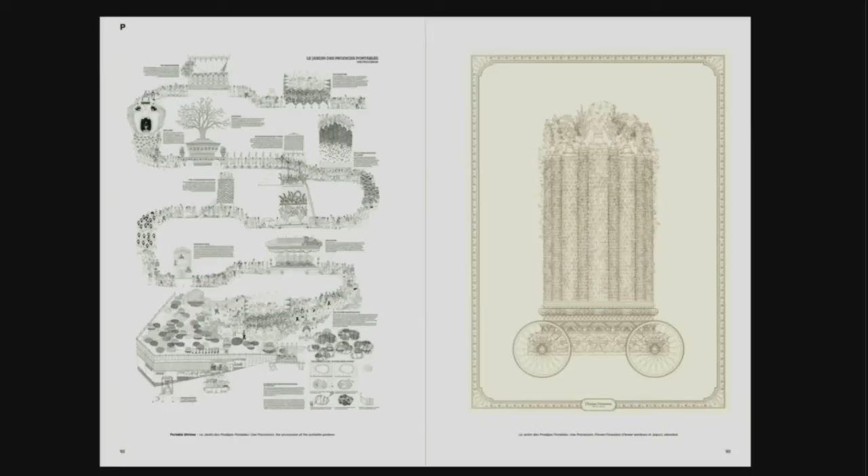If you open the book under the letter P, you could find one of our last projects called Portable Gardens, which consists of a series of garden temple vehicles. As throughout the book, all the drawings are tools consciously thought out for the project to be developed and represented. In this case, the collection of paradises travels each Sunday through different locations in Lausanne, Switzerland.

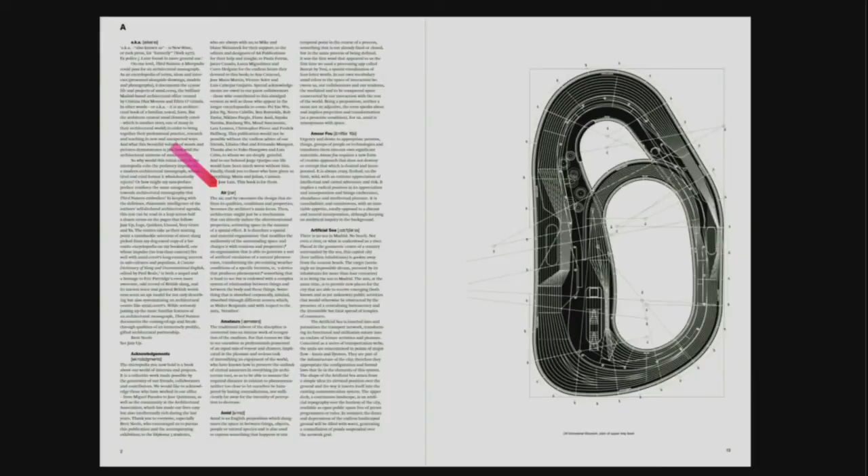As a friend said, the book takes the form of a micropedia, a term taken from the original British encyclopedia that had a three-part structure. One is a huge collection of volumes constructed by long articles and descriptions. Another is the propaedia, the hierarchical outline of knowledge. And the small one, the micropedia, is a collection of short articles meant for quick fact-checking.

If you are interested in one, you can go to the macropedia and discover more. You probably all know that Diderot and D'Alembert's encyclopedia was based on an attempt to compile all human knowledge, ordering and classifying it through a series of terms arranged in the form of an evolved dictionary. Instead of just presenting the meaning of words and their etymology, these primitive encyclopedias began to present them as small articles or monographic essays using a complex system of cross-references. Words were, therefore, doors to the unknown and yet to be discovered, exploratory tools to navigate the immensity of the world out there.

And then, under the letter R, you can find Rooms Around a Garden. So, opening the micropedia, this is the Giner de los Ríos Foundation, which was the entry to a competition and is our last constructed building. Now it's finished, and at the end of this lecture we will show you more things about it.

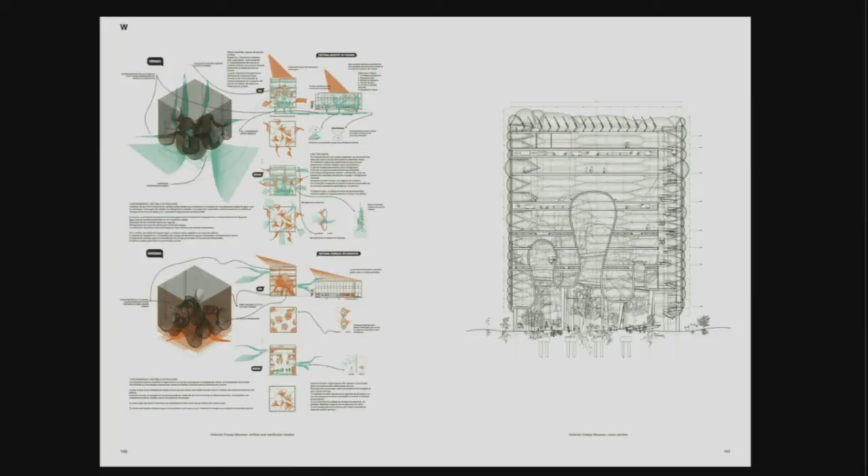We would like this presentation to be something similar to the action of opening this book, this encyclopedia, strolling through the pages and not trying to understand every single thing or project, but understanding this combination of concepts and projects as cultural constructs. And well, we are going to start with the letter S.

So architects normally reclaim space as the main subject of our discipline. And yes, we were also one more of these people that use the word, such that we always explain that these words, such as objects or things, if you touch them too much, they are spoiled because of the broad and intense use of it.

We admit, we understand that space is a difficult term and it has a high number of linguistic difficulties because of the broad meaning and the broad wide semantic field, and of course because of the extremely wide range of conflicting usages. And we can no longer speak without confusion about space.

Because to what space are we referring to? What are we dealing with when we are reclaiming a space as a working field for architecture? And what is the tradition of this term in the field of architecture? So for us, the word space has a condition that is inherently linked to a non-passive character.

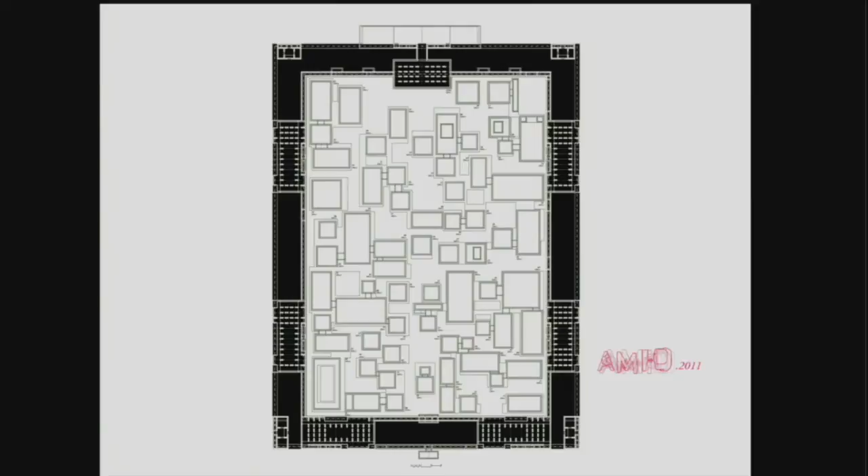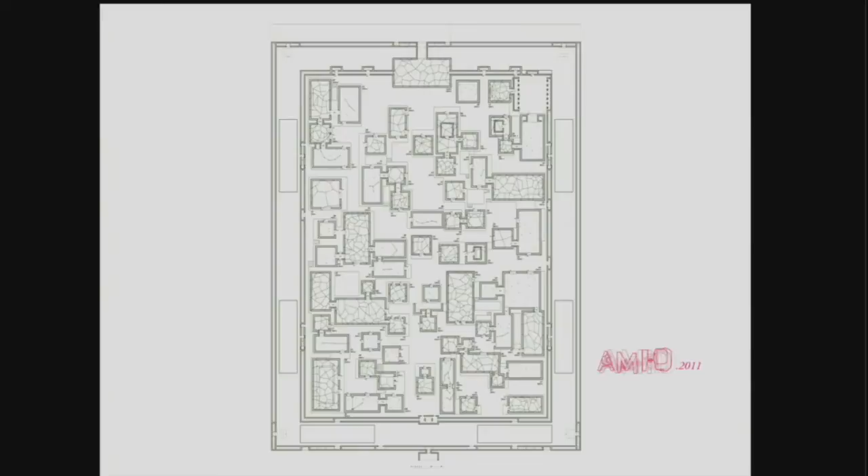This is the lower part—these structures are pieces that shape the generation of their excessive and carnal forms, like the proper social group.

The system is an inflation of large silicone membranes whose shape is defined by limiting their movement with lines and points on the surface, and afterwards they are inflated and stabilized with concrete, using the silicone membranes as finishing, waterproofing, and formwork.

To construct this weird mixture of different spaces, from workshops for the construction of the complex to gay saunas, gyms, small cathedrals, platform stages, discos, wedding chapels—of course—all serving as activators of the celebrations and events that happen at the same time. So in this project, and this is another drawing thought of as a tool for the project...

These kinds of things are consciously chosen. The discussion and the project turns around a social group, a specific subculture—that of the homosexuals—who were pioneers in the defense of civil rights in the USA, in the States, here. So we always explain this project in Europe and not here.

But now, we are trying to base every single decision of the project on its own peculiarities and culture and architecture, producing this architecture of micro-paradise that discusses the 60s utopias of free sex, the unconventional use of historical languages, or even the discussion about the assimilation of typically straight values—all of them quite present in their own culture.

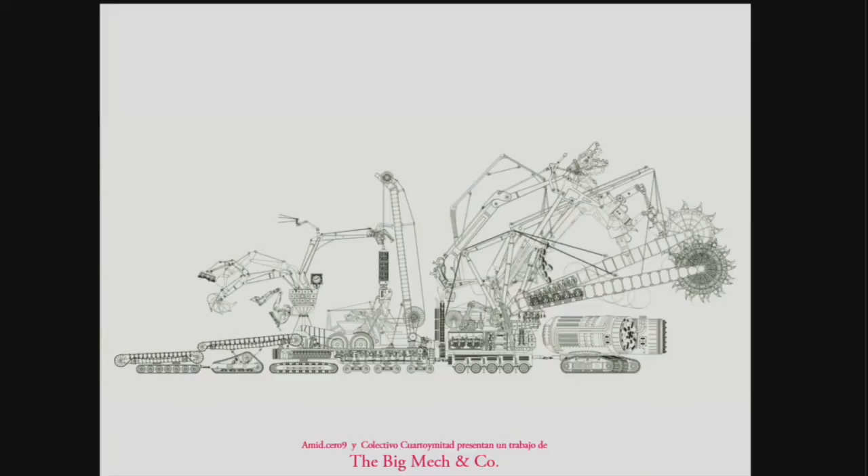Then four series of gigantic machines that eat buildings and defecate ecosystems transform the toxicity of the low-quality urban fabric. The first one is responsible for the defabrication of buildings and infrastructures, and is basically a logistic platform that perforates, tears, and separates the urban fabric, making use of the leftover construction machinery abandoned and left behind after the rise of the real estate crisis in Spain.

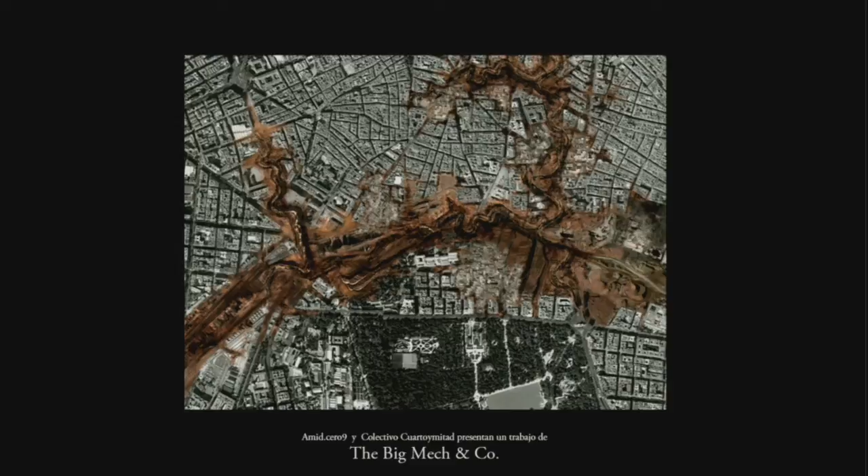So the routes of the machines produce this deconstruction and linear disruption of the urban fabric that introduces another geometry into the city, while proposing a new productive model. By stretching the idea of Haussmann in time, turning it around and releasing it of any repressive attitude, the destruction could become an incubator of freedom spaces, an alternative to the toxicity and low-quality materiality of the more than 10 million square meters built in Spain during the previous 10 years before the crisis.

So Madrid can be gradually destroyed and finished at the same time.

That gives back its image, magnifying somehow its monstrosity, and at the same time proposing an exit door to the dominant cultural model. Taking these subcultures as possible contexts, as models for our interventions, somehow we reinject elements of everyday activities and culture into architecture, taking us beyond the generic abstract characterization of collective entities as people, working class, or multitudes so common in contemporary discourses, helping us overcome the dilemma of pragmatism versus criticality.

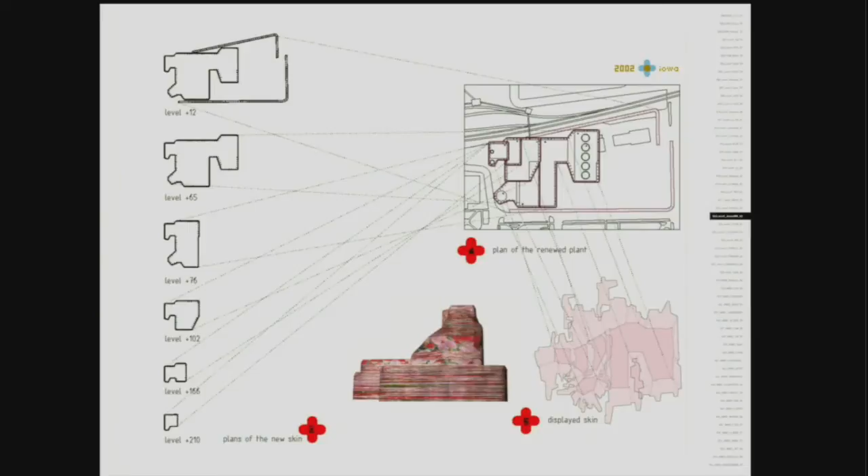That was the result of a competition for the refurbishment of the building. We proposed in that moment to transform the building into a piece of landscape, into something alive, a living mountain that is not just a cosmetic assembly of materials. We proposed to use a membrane of roses that construct the skin that wraps the building as a single common material.

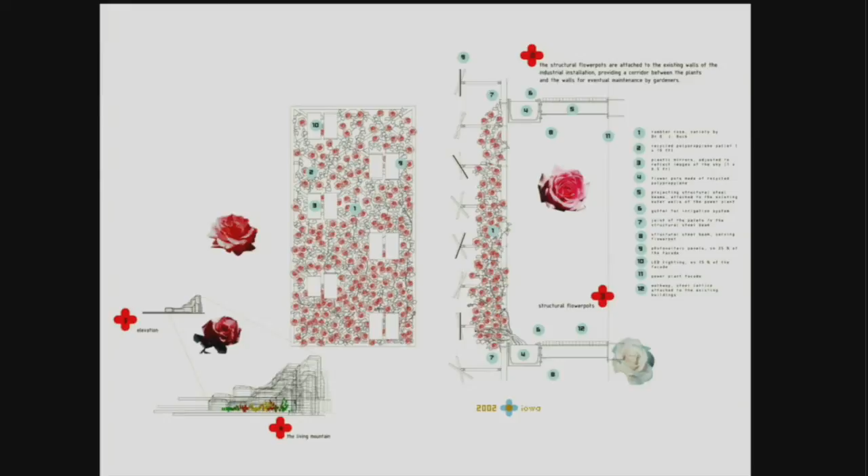The species for the construction were these rambler roses against a green background of honeysuckle, using the immense genetic material developed by one professor, Griffith Buck, who was born and lived in Ames, and who grew many, many species of roses adapted to the climate.

Establishing a starting color pattern, the colors change depending on the years, and the membrane attracts the butterflies and birds, since Ames is on the main migration route of butterflies and birds in the States.

And therefore the building would have been transformed into a real mountain where these birds can nest, attracted by the water tanks and this vertical garden. The result is an ecosystem subjected to human interaction, so buildings, roses, and humans, using gardeners' techniques and genetic selection to construct this image.

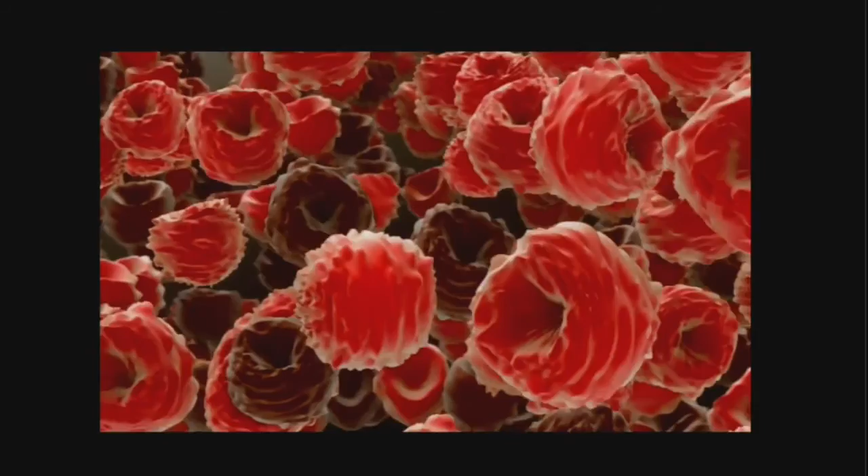This is a film that we did two years after that for the Biennale of Venice, and it's a trip through this vertical garden, kind of a journey just crossing and visiting the wrapping of roses.

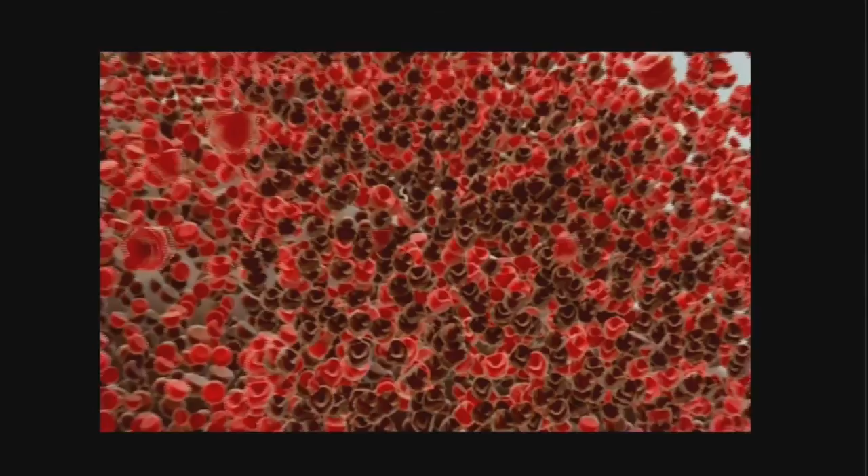The building was thought as an extension of the university where Buck was teaching, transforming it into a laboratory of genetic engineering where different species and varieties of roses could have been developed to resist diseases or climatic extremes and to test different colors and sizes.

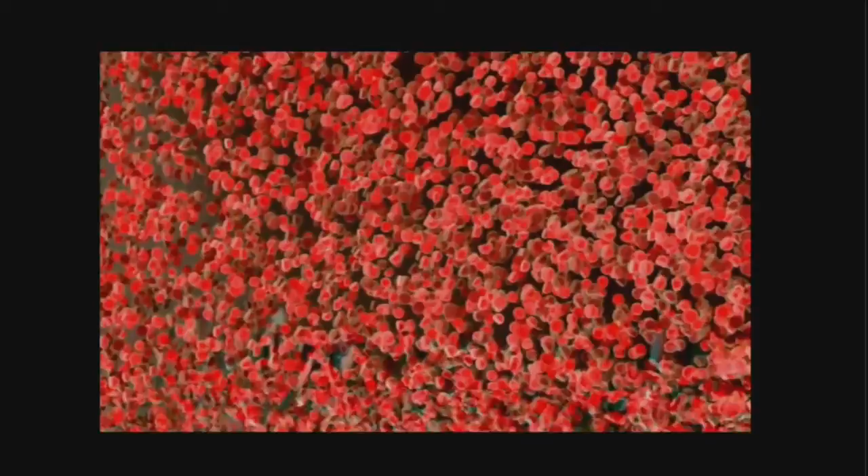Architecture could have been understood as a natural monument, artificially generated, but also as an energy infrastructure and architecture that can be converted into a living system. Could have been.

But human and animal relations have been charged with power, usually an oppressive and dominating power by humans over animals. Usually animals have been the powerless and marginalized other partner in human-animal relations. Their ethical invisibility enabled humans to manipulate, exploit, displace, and consume animals constantly, and many animals somehow have their own territories to which they are adapted.

But commonly, these spaces are replicated simply. The spaces of the animals in our societies usually replicate those of the humans, fixing animals into our spatial orderings, like the zoo, the farm, the slaughterhouse, and the laboratory. Only a few species have the capacity to transgress the imagined and materially constructed spatial orderings of human societies, and only on a relatively small scale, animals have been able to evade this domination, and usually are persecuted because of that, as the plagues.

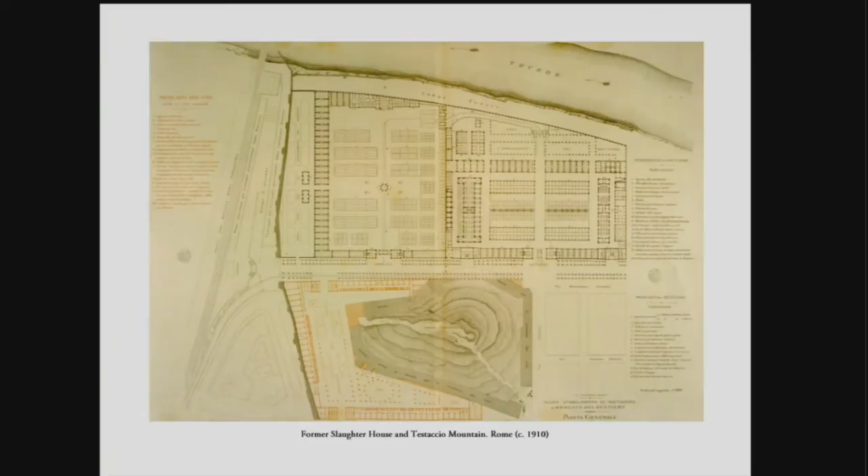It's a gigantic open cage that connects the former slaughterhouse of Rome with the leftover amphorae pile of the Testaccio mountain, considered hill number 8 in Rome, situated in the south part of the Tevere River. Testaccio is a wild and weird place that accumulates discos in night restaurants and also workshops excavated in the amphorae landfill.

The project discusses the relationship among humans and post-natural species directly or indirectly modified by humans, such as plagues or domestic animals. It's the most visible part of a larger project planned by the municipality of Rome and the FAO, financed with European funds and hosted in two of the buildings of the former slaughterhouse, following the efforts of various institutions to collect animal and vegetal genetic resources around the globe, aiming to preserve the diversity of indigenous breeds and crops.

So the initial project consisted of a bridge that linked the slaughterhouse with the artificial hill, which cannot be visited because of the poor stability of the slopes, but it is an excellent place for the archive, because the temperature and humidity conditions are very homogeneous.

The bridge evolved into a huge aviary for the flight of the birds, excavated in the hill, where you can see the most hidden part of the institution: the archive that gathers, in a buried columbarium, the genetic material of animal species modified by humans.

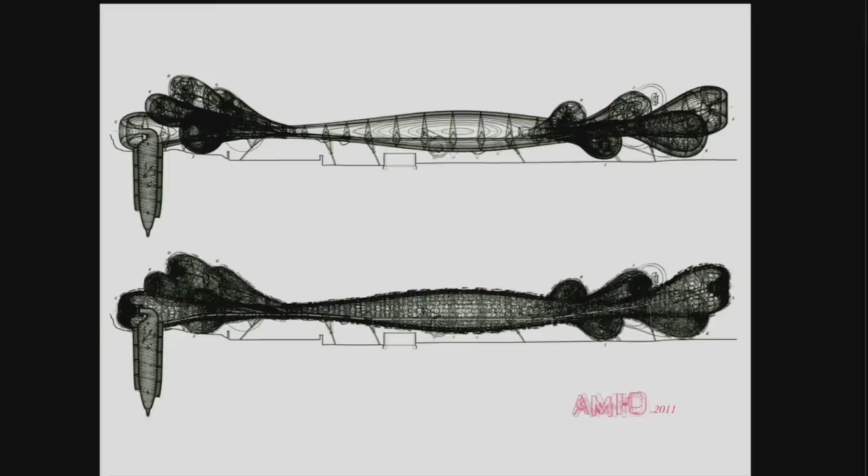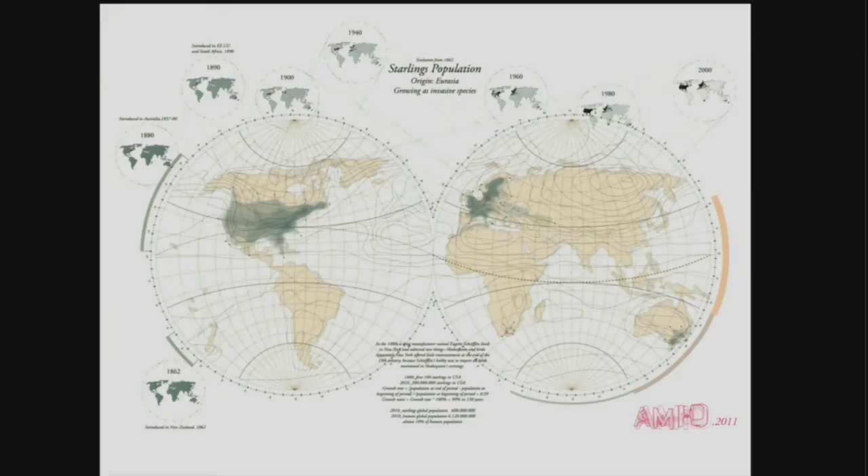And the open cage is artificially cut off for these starlings, an invasive species considered by international institutions as a plague. During the annual migrations, thousands of them arrive to Rome and produce these beautiful black clouds, these ever-changing flocks that maybe you know, but they also pollute the city with their droppings. In 2010 the starlings were 600 million, a number that's 10% of the human population.

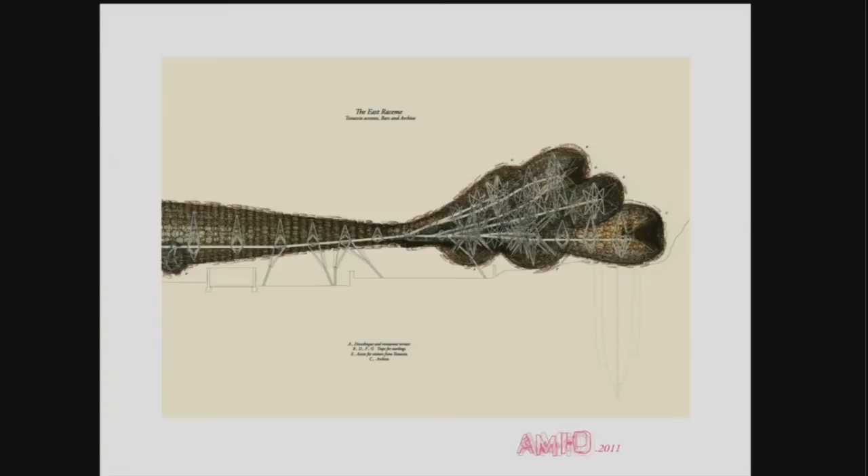The aim of the project is learning from traditional bird traps, to construct a huge and open basket to attract them and to construct them a huge nest, providing a resting place suitable for them to rest and fly. The space inside is long enough to allow the starlings to fly, and the edges are organized as traps and also organized for people.

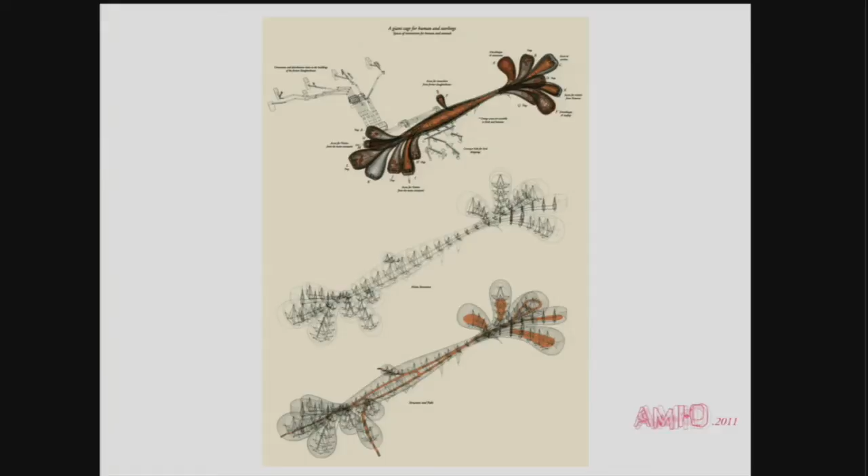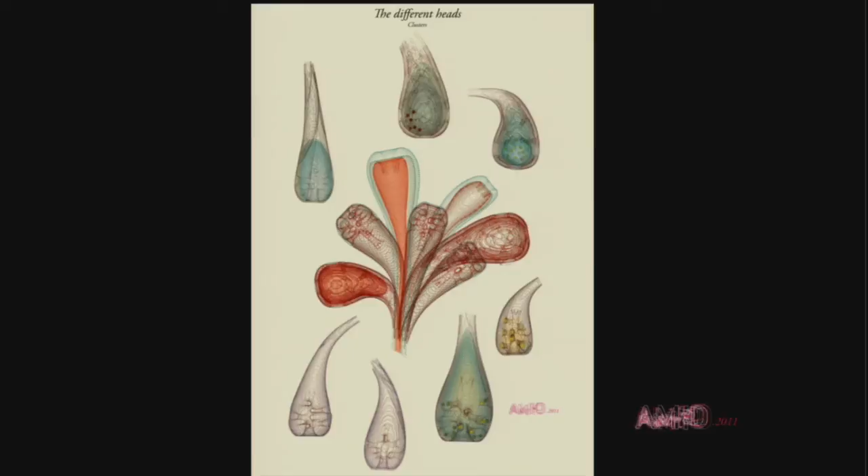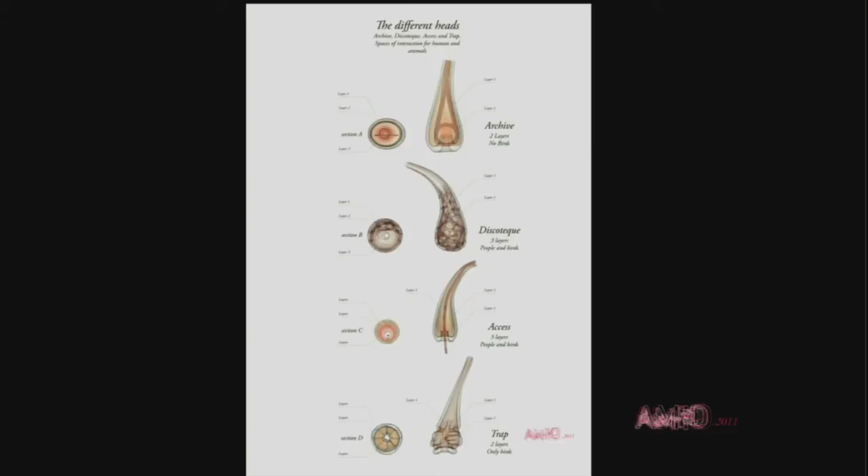This hybrid aviary is based on a system like those developed by Le Ricolais, the French engineer, with a central bearing compression and stressed exterior members. The piece replicates the geometric condition of the big trees of the Tevere River, where the starlings can nest and rest, and the clusters of bunching ends respond differently to both edge conditions. Some are only for birds, and some are for humans, like this extension of the terraces of the restaurants and the discos now in Testaccio.

So what was the former slaughterhouse, the site of the suffering of animals, could now be inhabited by a plague and converted into a palace for post-natural species.

The term third nature, which gives name to this publication and most of the work we have been doing in the last 5 years, both in academia and the office, was originally coined by this guy - not by us, sorry. A guy called Jacopo Bonfadio, maybe you know him, during the first quarter of the 16th century, defined third nature as a counterpoint to first and second nature.

It was coined to refer to a new reality that was appearing at that moment: the new Renaissance gardens. It's a well-known story, well pointed out and explained by some historians, about a new and unexpected material condition, something in between natural and man-made.

Obviously, as you've been seeing, this is something that interests us. But what's maybe most important for us is that these gardens were culturally produced and received. Remember that references to classical culture and mythology were crucial in these gardens to understand and perceive them properly. So these gardens, on the idea of third nature, established new culturally constructed relationships, not only with nature but also with technology and history, to define spaces with a radically new materiality.

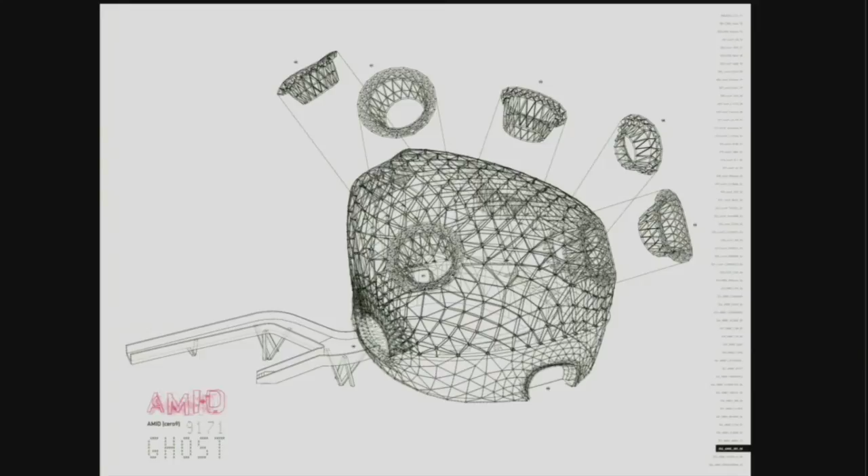At the same time, the interior space is defined by big halls connected with the exterior in a selected way, through entrances, views, and of course sunlight connections.

For the Cherry Blossom Festival, what we proposed is the construction of a contemporary chapel, a building that establishes a close bond with the landscape through its presence, position, volume, and material. Like a church for pilgrims, this building is a chapel that floats in the landscape, related to the huge scale of the whole valley and the 11 villages, and is an assertive building that uses scale to establish a point of reference in the valley during the fiesta.

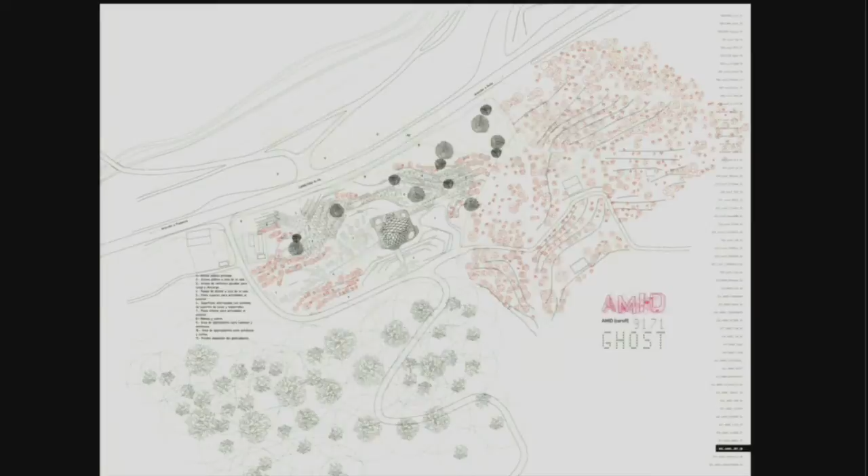Although it's really small, it's 1,000 square meters, it dominates this big landscape, and it will be the future assembly of natural and artificial elements like nature, animals, cherry trees, tourists, and inhabitants all together.

Our proposal for the landscape, which is always changing in color during the year, from green to white in spring, to red in autumn, to brown in winter, is a ceramic building with large shining tiles that provides a contrast with the changes in color of the valley along the seasons and the mists and the changing weather conditions.

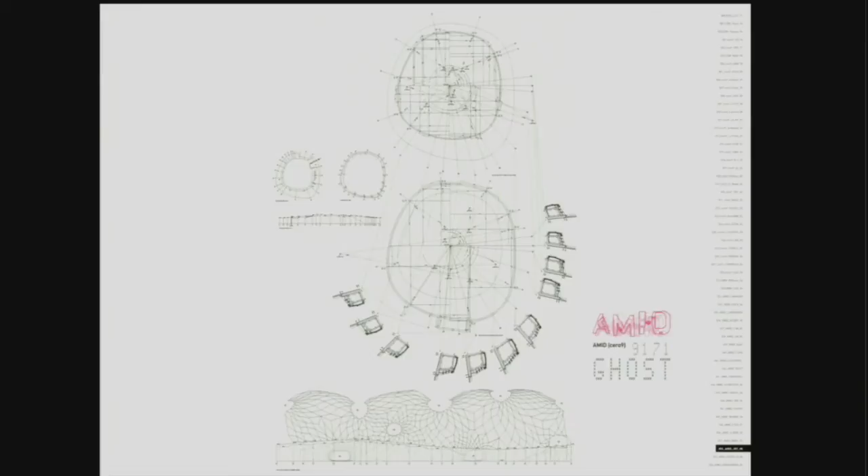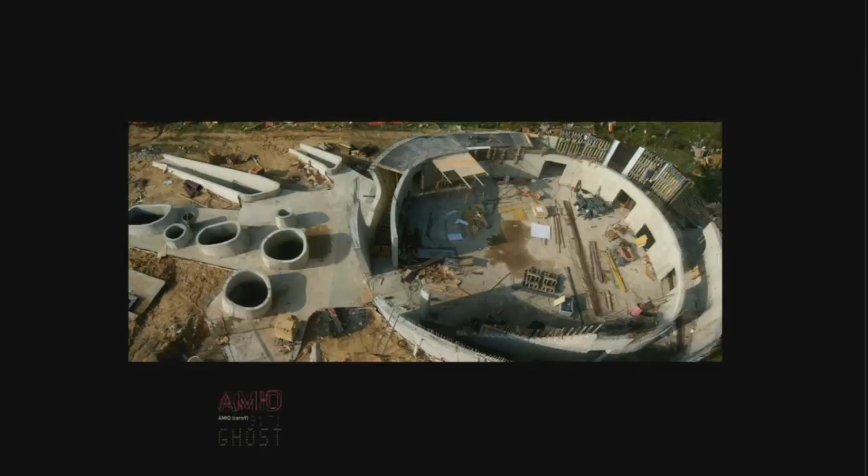The building is organized around a central space surrounded by a concrete ring, occupied in the upper level with a mezzanine. This is the concrete ring under construction, the ground plan, and the basement under construction, and what we call the crypt, which is the system of rooms underneath.

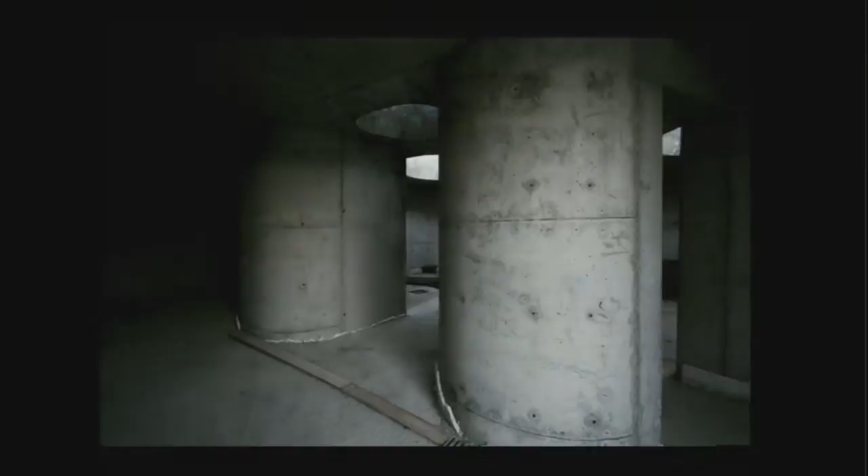You can see some images of these rooms of the crypt underneath. The inner space is connected with the surroundings through the basement level, the crypt, and also through a big ramp that leads directly to the upper level.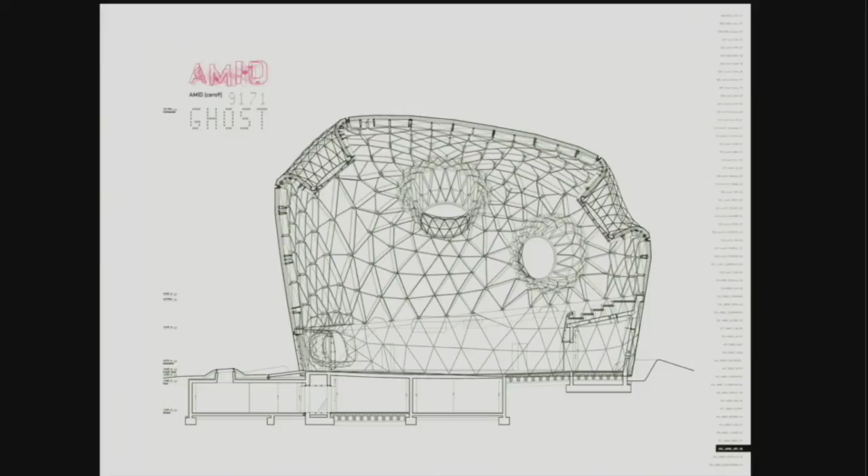This ceramic dome is composed basically of a non-structural lower part, which covers the concrete ring, and an upper part, composed basically of small steel bars and plates that ensure a similar behavior to that of a dome.

But as Cristina was explaining, there are these big holes disrupting the surface of the dome and its structural behavior. You can imagine what happens when a hole which is not meant to be in that place disrupts this kind of structural behavior supposedly that of a dome.

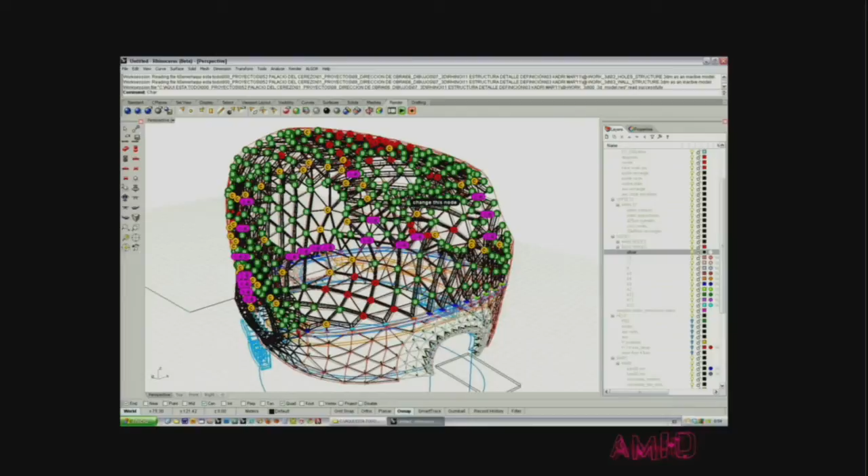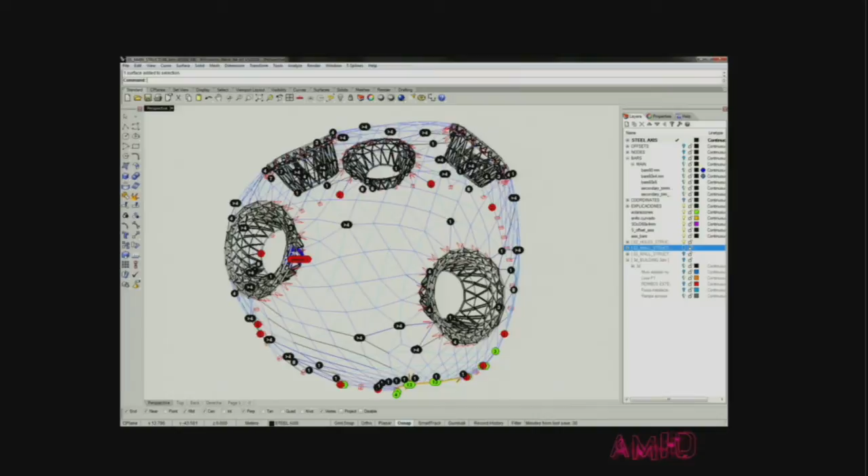The discontinuity produced by these holes was sorted out somehow whenever the surface is interrupted, just bending in this way, the surface of the dome, and being capable of manipulating and modulating the light entering inside the space, also modulating the lighting conditions, and introducing stiffness whenever needed in the surface of the dome. Because of that, these holes, these kind of immense lanterns, stabilize the structural behavior of it.

And also deforming and transforming the tessellation of the surface of the dome. Because the problem of the tessellation of this surface is a really important one, and that can't be done by digital means.

We were forced to really draw every single thing by hand, trying to define the geometry of the tessellation of the dome, as you can see.

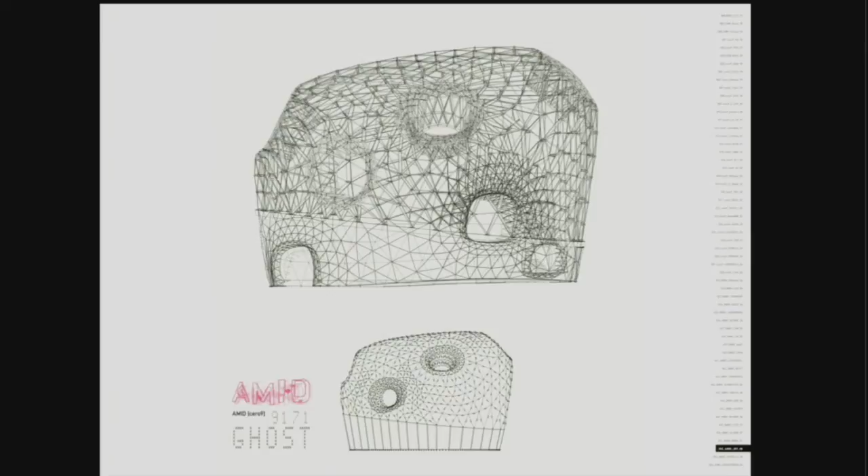The interior is a big room, understood as a three-dimensional structure of interwoven steel plates, as you can see, that ensure, as I was explaining, the similar behavior to that of a dome. There are only 60 mil steel bars, really thin ones, that grow inwards toward the interior of the dome. They are joined together.

There are multiple problems related to the geometry of the surface, and we decided to use these slender plates to really ensure that they deform to follow the normal, perpendicular lines at every single point on the surface.

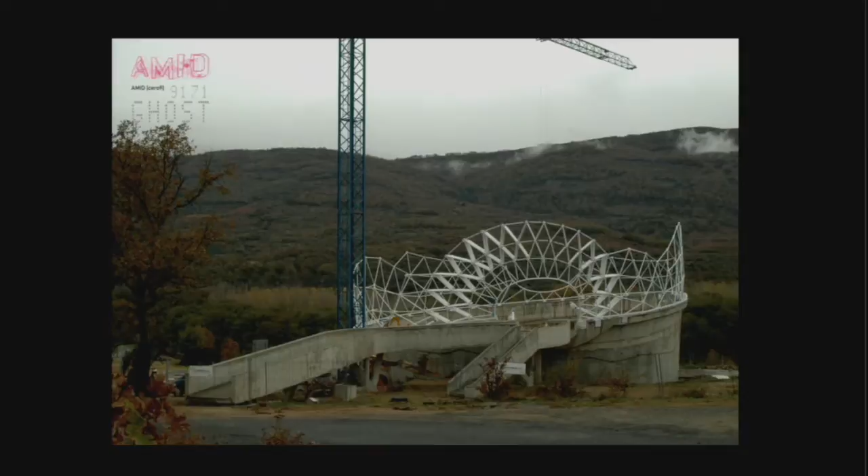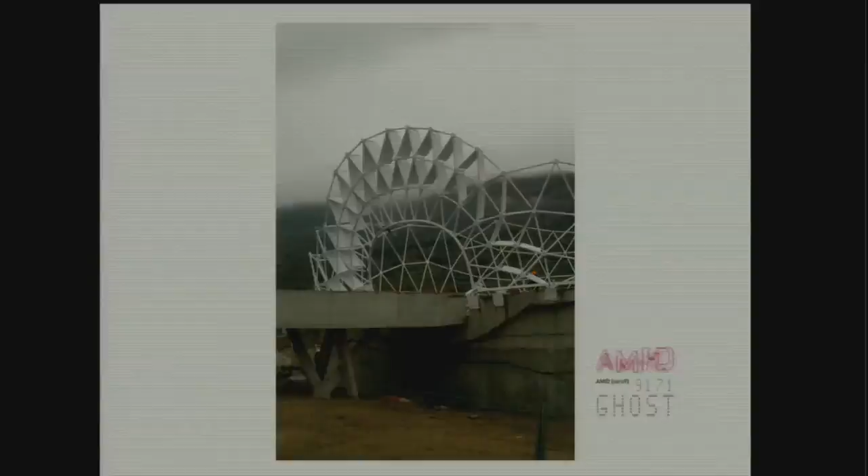As you can see here, in the part that is already constructed, this is replicated toward the inside of the dome with a mosaic of rhomboid figures that serve to fine-tune the acoustics of the hall, creating a wall around the whole space with light modulated by the holes.

So one politician one day in Extremadura promised an auditorium, and the competition was exactly that. They wanted an auditorium, but this strange hybrid cannot really be called a theater or an auditorium anymore, because neither the urban typological models for halls, nor the events that take place in such buildings, nor their definition, organization, form, or even material, mean anything for this case. This building is going to be closed most of the year and open only for the fiesta, for several days, maybe a week, or for several festivals—similar to a church on a pilgrimage day, only open during very short periods of time. So it's a weird typology, a rare new species.

This is the last project we are going to show you today. It's the building I mentioned at the start that is already finished. If you open the book, under the letter R, you can find Rooms Around the Garden.

That was a winning entry 10 years ago, in 2004, based on the recovery of an existing site with important memory, and the restoration of two buildings that are now there, refurbished.

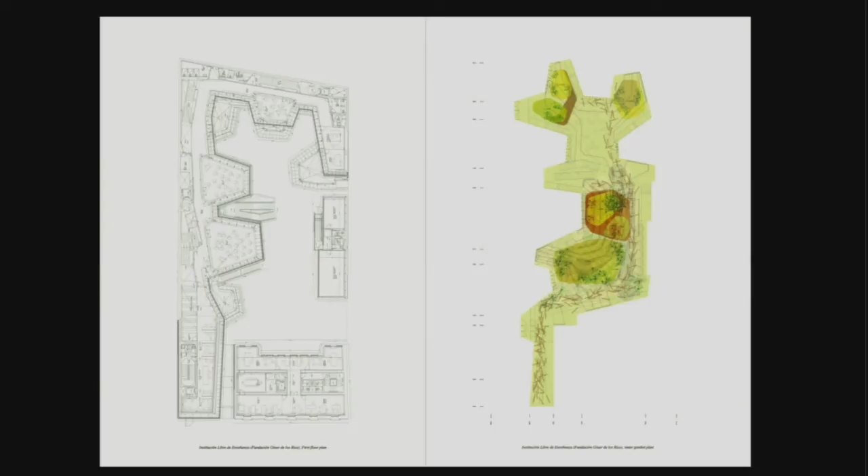Therefore, our project is basically not a building, it's basically a garden. It's a garden with a collection of rooms, outdoor and indoor rooms. This is the garden, and the collections of rooms are here. You will see more very soon.

Therefore, the target is inverted in this project. The garden is the main space to be defined with the actions, whilst the new building and the existing ones become just what configures the space of the garden.

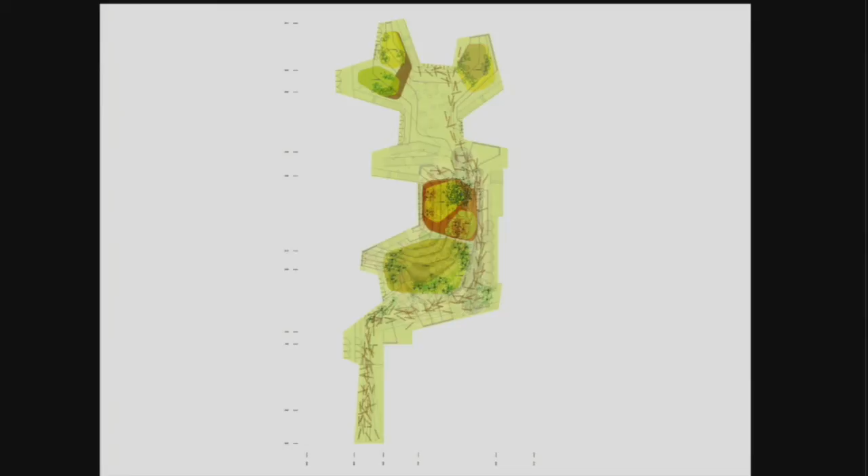Rather than a frozen final image, this project works with processes based on a management system, combining irrigation, mulching, composition of soils and greenery and so on. The result is simple and free from geometry and figures, defined not only by the changing colors of the plants, but also by the reflections of the surfaces and the overlapping layers - the vegetation, the lattice, the glasses, and the building structures.

Also the garden is extended in the upper parts of the levels of the buildings. It's a three-dimensional garden.

So everything in this garden, as we explained with the third nature, is decided based on the particular culture of this institution. This drawing shows the construction of the space of the garden, following a path where the darker points are, let's call them, the steps of a path that crosses the garden and defines the volumetry of the project, the building as a background and as a necessary background for the garden, so that the garden and the building itself are intrinsically linked. Everything is decided based on the particular culture of the institution.

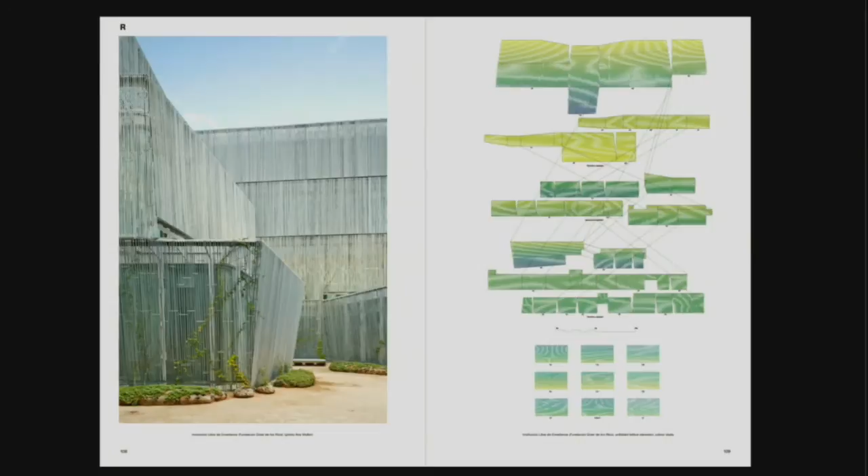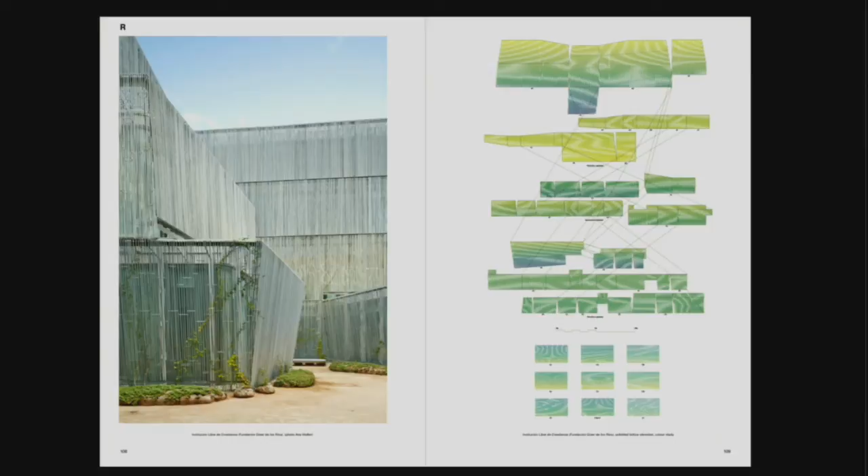The cladding is at the same time a garden facade, a lattice, and a facade towards the interior classrooms. It's a kaleidoscope of changing geometries that expands the size of the garden through reflections and the position of the volumes, composed of a multiplicity of steel bars. It's a kind of geometric kaleidoscope of surfaces. The garden is pretty small if you see the plan, but perceptibly it's really huge.

The lattice also acts as a filter to the classrooms and modulates the views, serving as a transition between the outdoor natural elements and the indoor artificial constructed spaces in the interior.

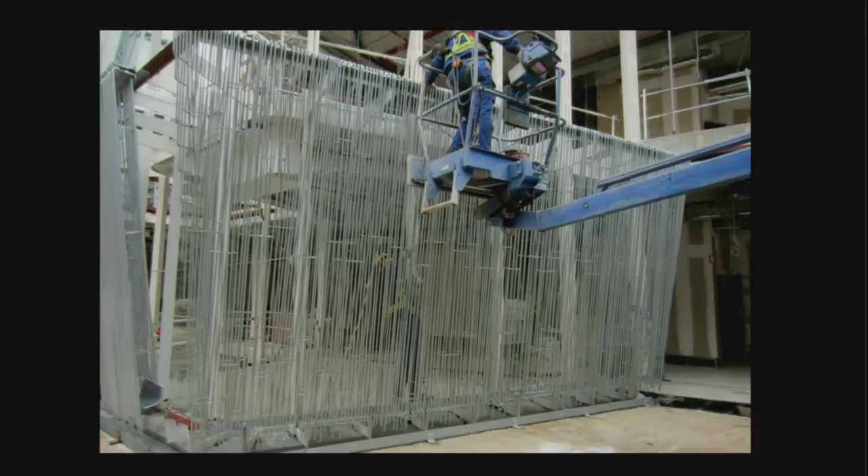As a light veil, the density of the elements fits according to sunlight exposure. There are like 1,000 different panels, none of them equal to another, and all of them have different densities.

Maybe you're perceiving subtle differences that allowed us to filter the views, including from inside the classrooms, and also to block direct sun radiation in the interior, improving the energy efficiency of the facade, and to hide and expose the classrooms to the garden.

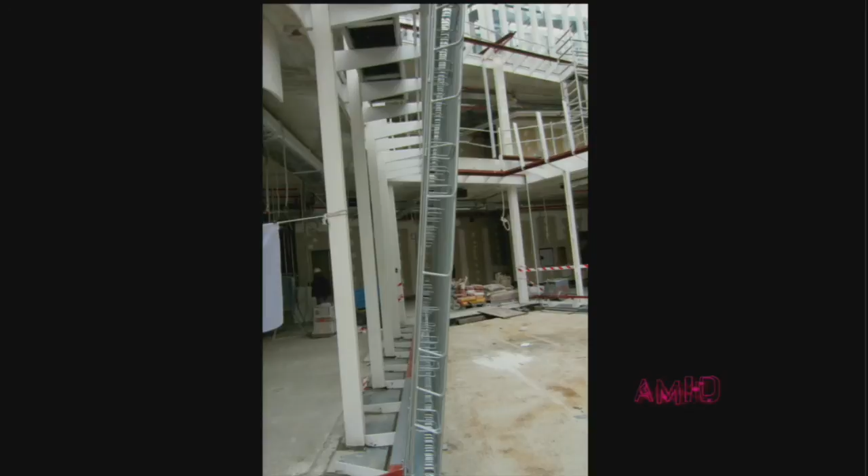The lattice is the kind of thing you can only do in Spain, a country where there is still craftsmanship but also a level of industrialization that allows us to make this thing, composed of 3 layers of really thin steel bars, like typical reinforcement for a concrete foundation, but without the corrugation.

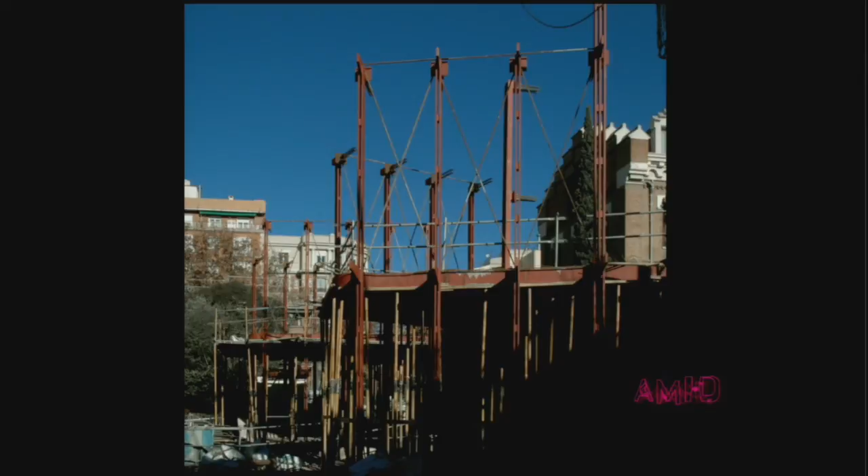It has no frames, and the layers are linked together by brackets. The steel structure is placed between the glass of the classrooms and the steel lattice. It's a system of slender plates and cantilevers attached to the concrete slabs, situated between the layers of the cladding in order to hide the structure perceptively.

The classrooms, the interior spaces, are multifocal spaces with no predominant direction, surrounded by an enclosure of curved glass and a system of curtains that allow modification of the acoustics and lighting conditions. So mainly those are the classrooms, and this is a thick wall, the perimeter.

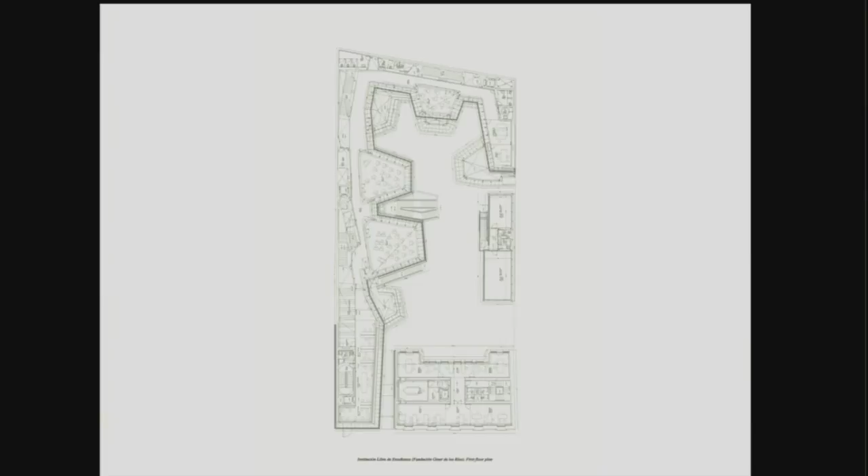In the program, the classrooms should have different sizes, and our proposal is based on a system whose geometry, different sizes and groupings permit different configurations of the space. The space becomes an educational tool due to the open possibilities of the system, understood and perceived as an extension of the garden.

The new building can be defined as a thick, specialized dividing wall, a hollow perimeter wall that shelters different side rooms, widening and narrowing the inner public working space. It's a deep wall transformed along the perimeter to shelter staircases, elevators, toilets, installations, and even the collection of the Fundación Giner de los Ríos, with an exhibition system of hidden drawers and shelves in the wall, connecting vertically different spaces.

So now, to finish, we are about to enter the building, and we will lead you following the inner path throughout the garden, and the construction of the shape through the movement of our eyes along the garden. We always explain to our students that our eyes are not watching our surroundings, are not seeing our surroundings—our eyes are projecting our surroundings. We project what we are seeing.

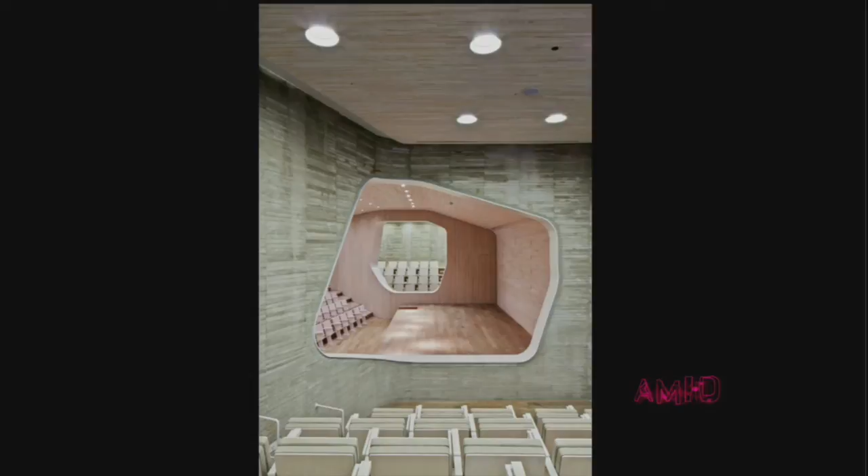If we look now to the rear part of the garden, we find a huge stair that drives us to the excavated and secret auditorium underneath the building. The footprint projection is the footprint projection of the upper garden, generating this multifocal auditorium conformed by a landscape of spaces for public events that look to the main stage.

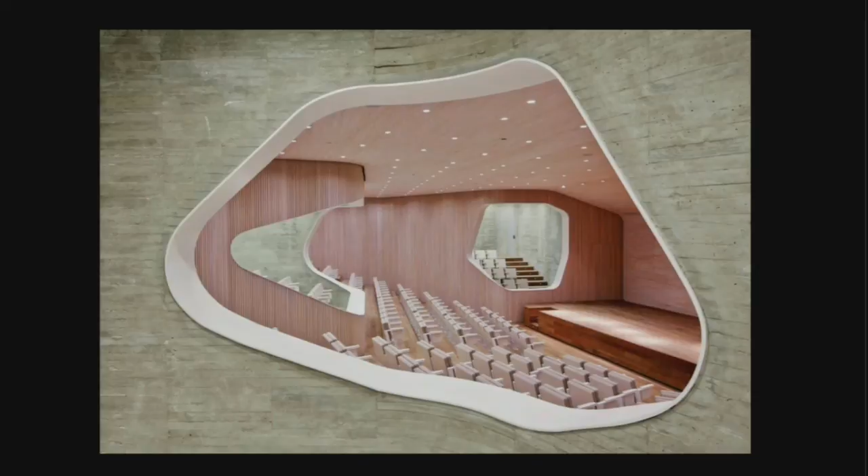So again, a system of spaces that look to the main stage through these large holes that look like strabismic eyes. We call them the eyes, and they act as bearing beams where the loads of the upper pillars are held. These rooms can be open or closed to expand the auditorium.

So, therefore, the project tries at the same time to install itself with what we call the sentimental geography of the institution and also their ideology, carefully weaving the threads of relationship between the people, this group still alive, and their descendants, and the mature intellectual legacy of the institution, in order to build an evocation of the institution's spirit without an uncritical, or self-indulgent, conservation of the past.